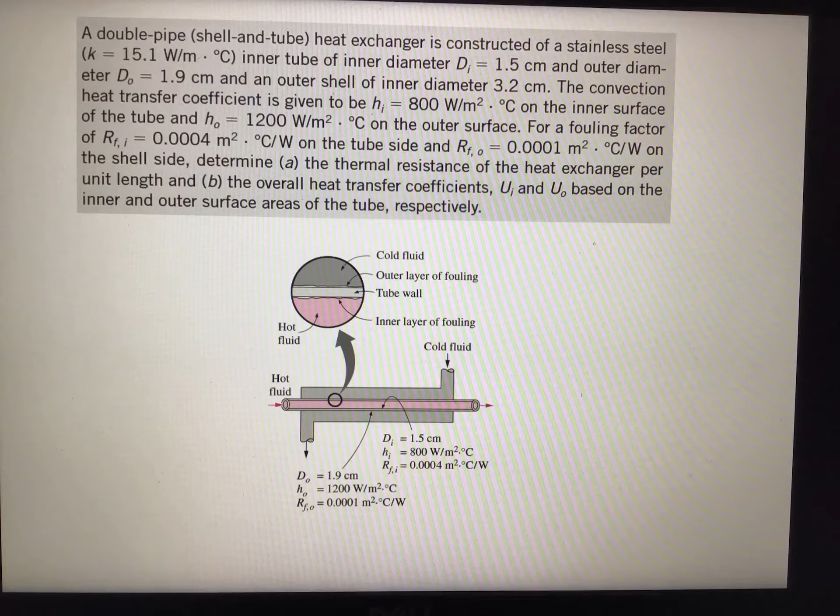We discussed during lecture that the overall heat transfer coefficient U, and we derived the equation for thermal resistance: R equals 1 over UAS. This is for the overall case. If you consider the inner surface, instead of U and A, you write Ui Ai; for the outer surface, U naught A naught. We all know this, so let's start with the solution.

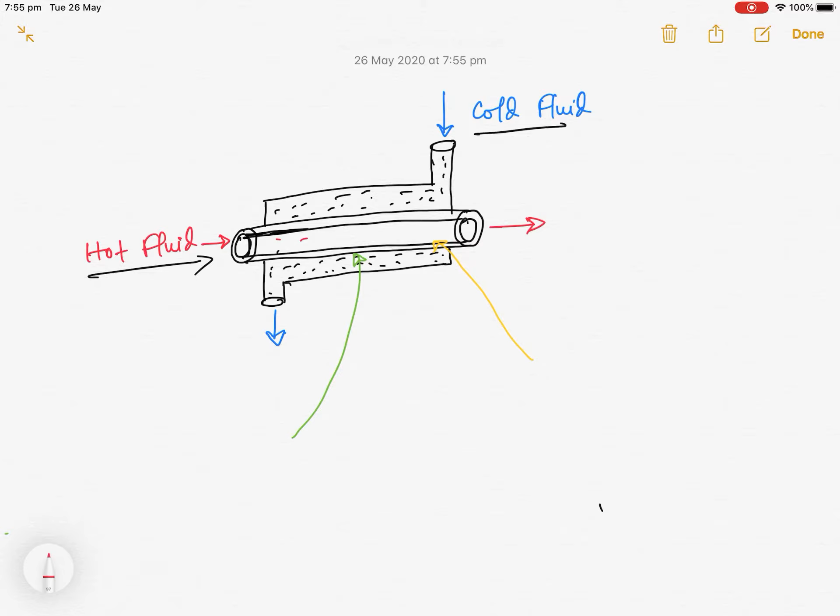Look, this is actually the drawing here. The hot fluid is going this way, and the cold fluid is coming from this way. So actually here, if we draw, this is the hot fluid.

It is going through this stainless steel, this metal tube, the inner tube. This is hot. This hot fluid is going through the inner tube, and the material is steel. This red color is the hot fluid, and you can see the color for the cold fluid.

Maybe I can use that color here instead of black. So this is actually the cold fluid. Now you see, this is actually the inner surface, inner tube, and this is the outer tube.

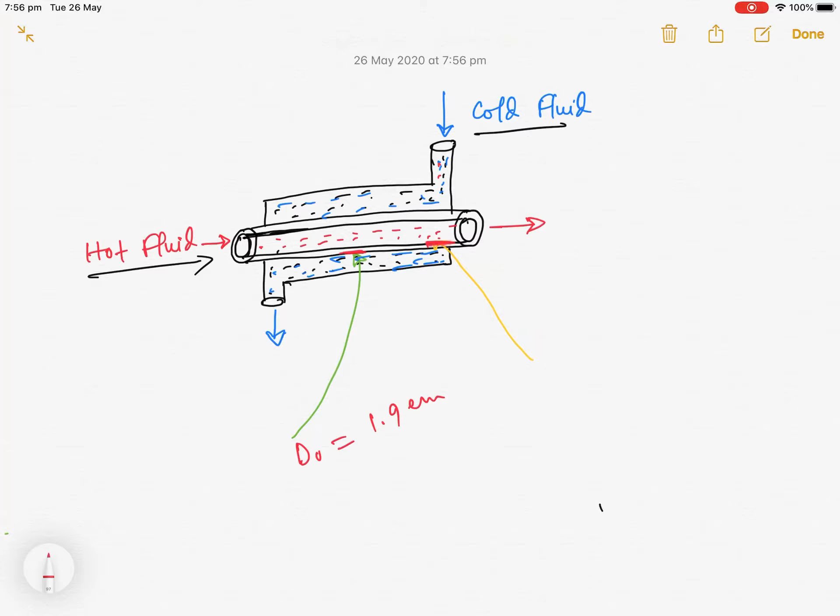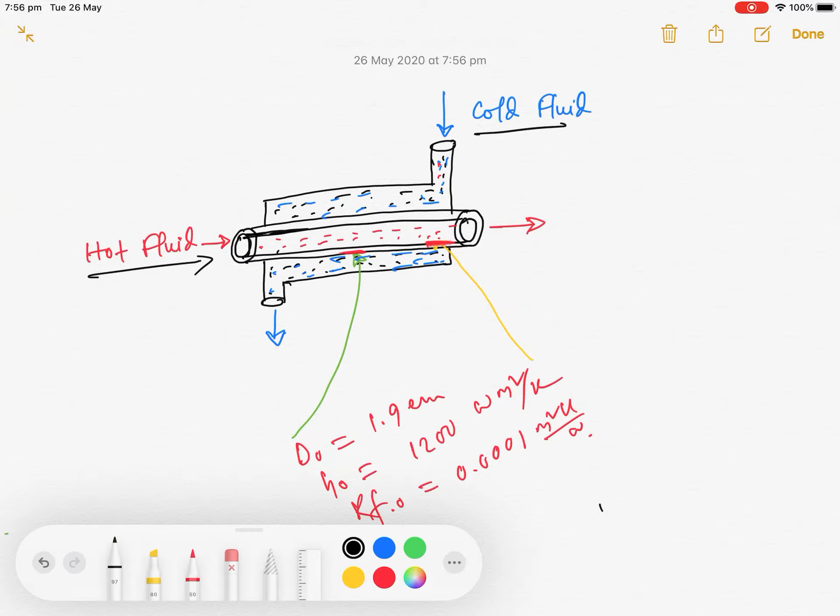For the outer tube, the diameter is given d naught equals 1.9 centimeter, the heat transfer coefficient is 1200 watt per meter square Kelvin, and the fouling factor is given as 0.0001 meter square Kelvin per watt. That's the values given.

Similarly, for the inner tube, inner surface, the inner diameter di is given in the question as 1.5 centimeter. H I is given as 800 watt per meter square Kelvin, and the fouling factor is 0.0004. This fouling factor is eventually the thermal resistance.

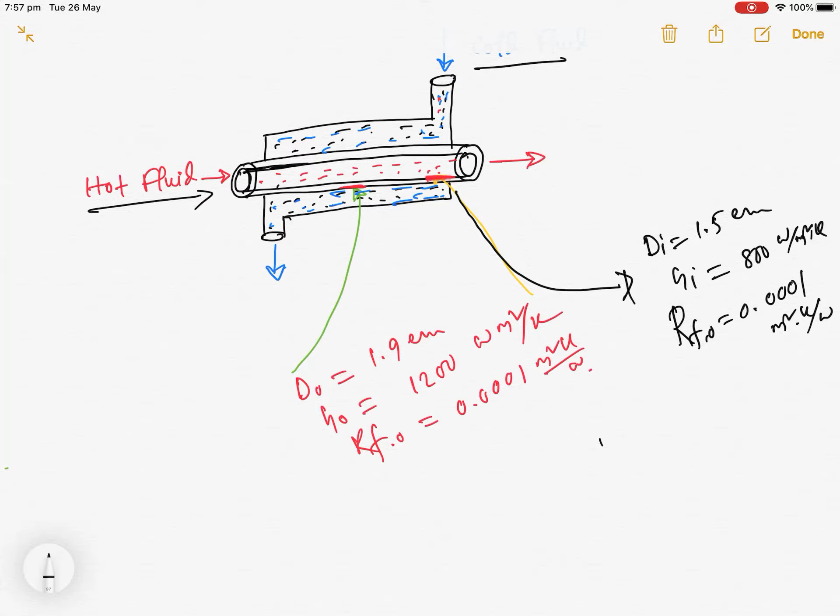We need to calculate this. To solve this problem, it first asks about the overall heat transfer coefficient for inner and outer surface and the resistance. If you know these relations, I believe you all know them from the formula.

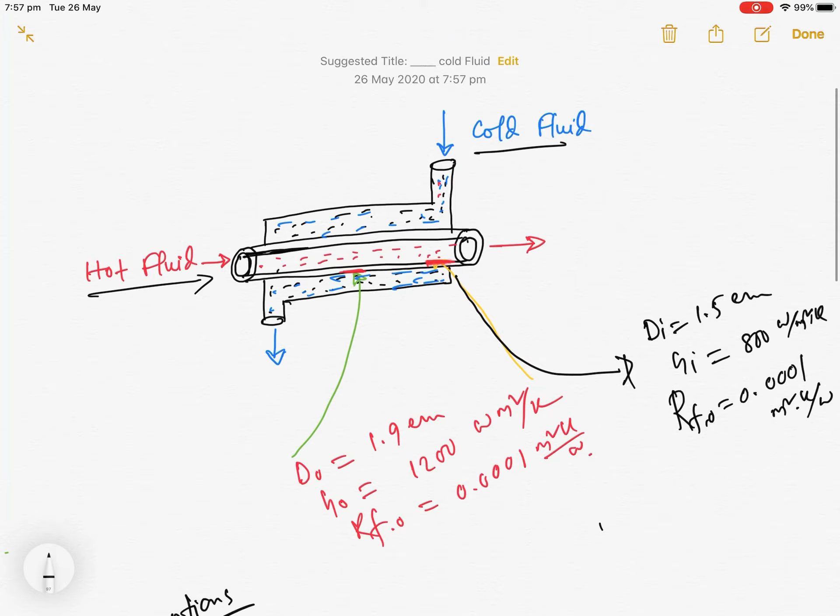Maybe what we can do, we'll not write down detailed assumptions here, but you all know that when we solve this sort of problem, we need to write some assumptions. What could happen is these fouling factors and heat transfer coefficients in real cases could change with the length of the domain.

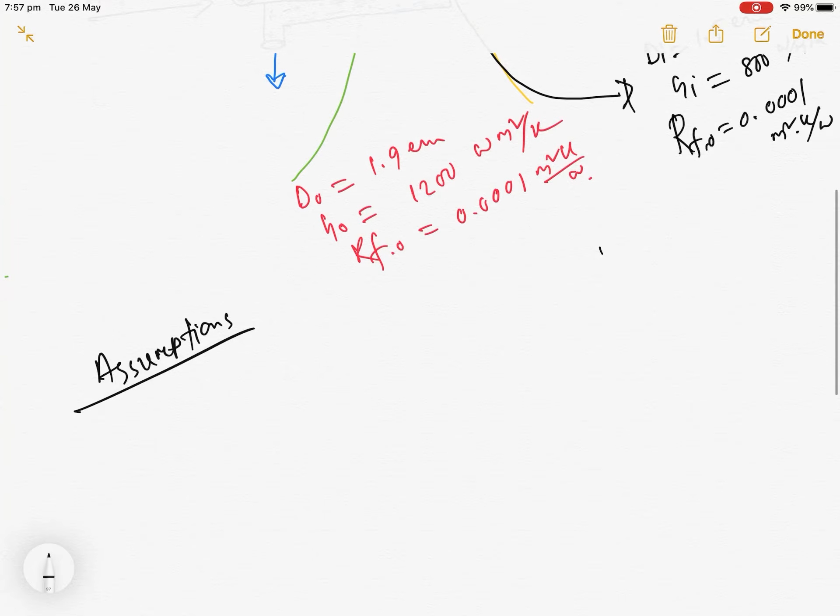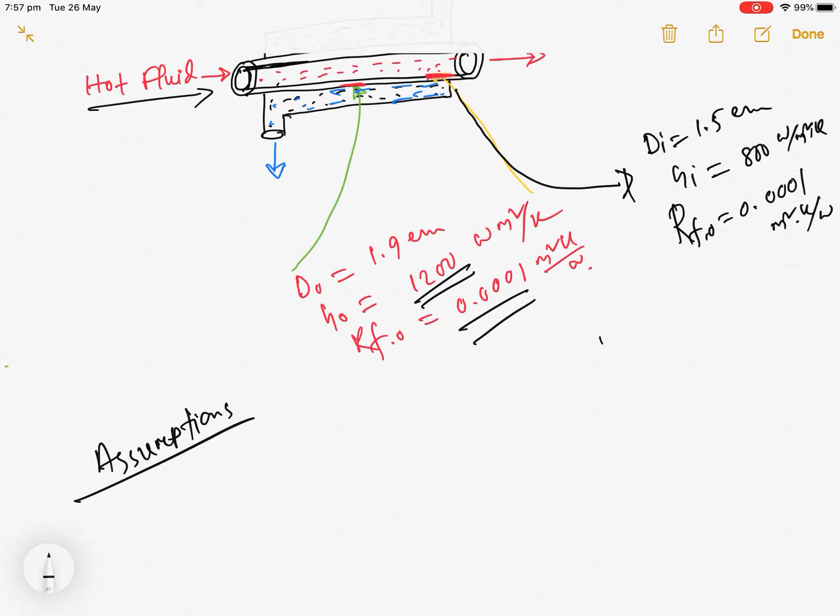In this case we consider that the fouling factor and the heat transfer coefficient are constant, and that's correct—it is given in this question that the fouling factor and the heat transfer coefficient are constant. So you can write that it is constant.

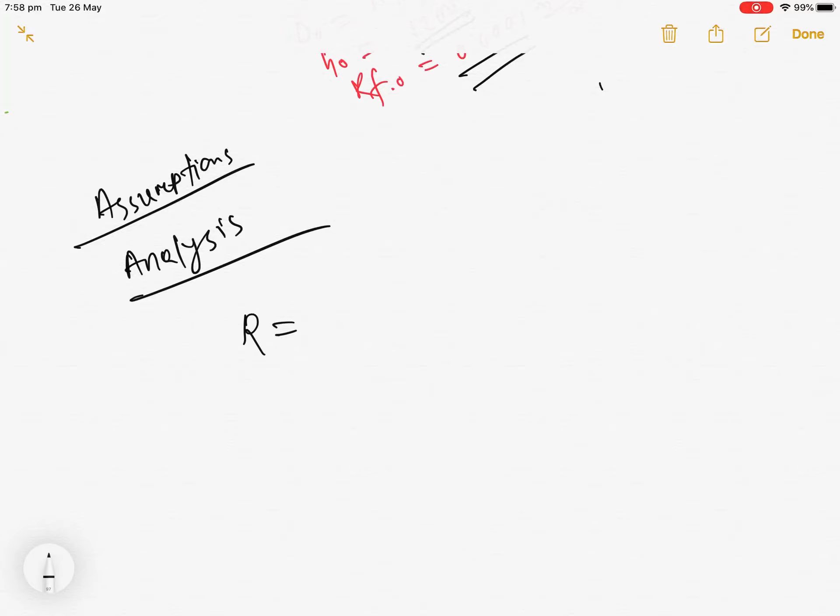So now when we start with the analysis, we actually need the thermal resistance R, and we know from the theory that R equals 1 over U A. This is from the literature, we already discussed it. It is the overall values.

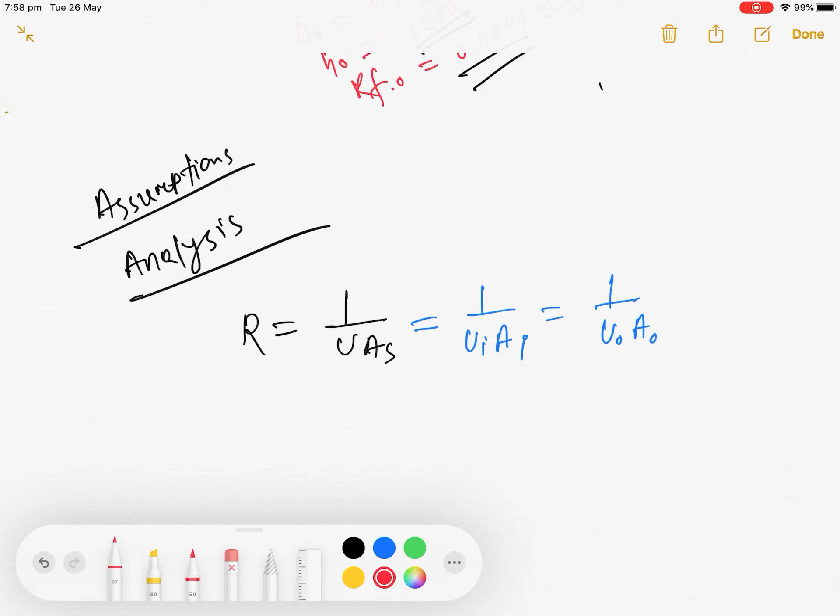If we think about the inner surface of the tube, we can say it is Ui and Ai. If it is for the outer surface, we can say U naught, A naught. So the first question is we need to calculate this R, and the second question is we need to calculate Ui and U naught. This is the second part of this problem, and this is the first part.

So that means you can see from here it is an expression with 3 unknowns, but we only know the area, and we can calculate the area easily. But then how will we calculate the resistance or the overall heat transfer coefficient if two values are unknown? So what do we know from previous weeks? Thermal resistance we can calculate in different ways.

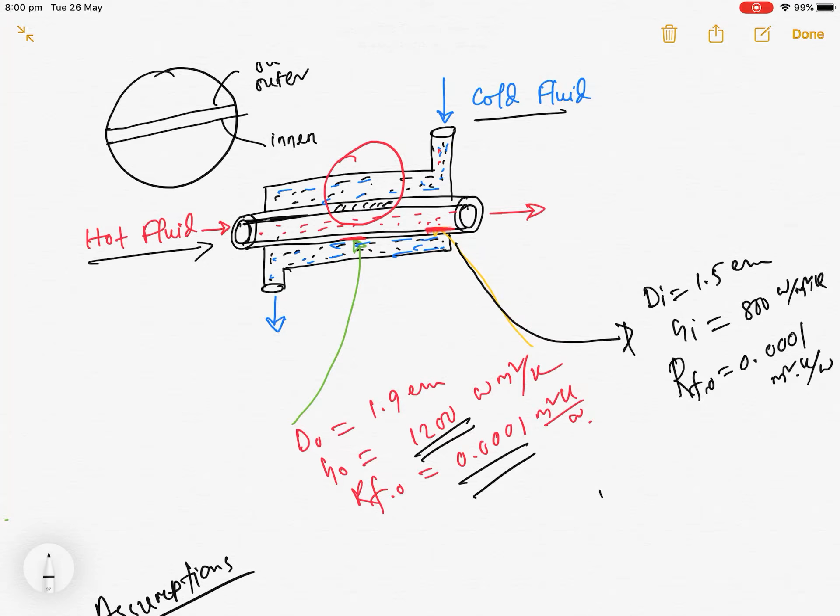So here, if you see, this is a double pipe, and you see the inner and outer tube from this drawing. If we enlarge this small section, it will be something like this - this is the circle, the red circle. Using the black one, this is the thickness. So this is the inner part, and this is the outer part, the outer section.

According to this question, it's given that we have the fouling factors here at the inner and the outer pipe. So we just enlarge this section, the red circle, we just enlarge that section.

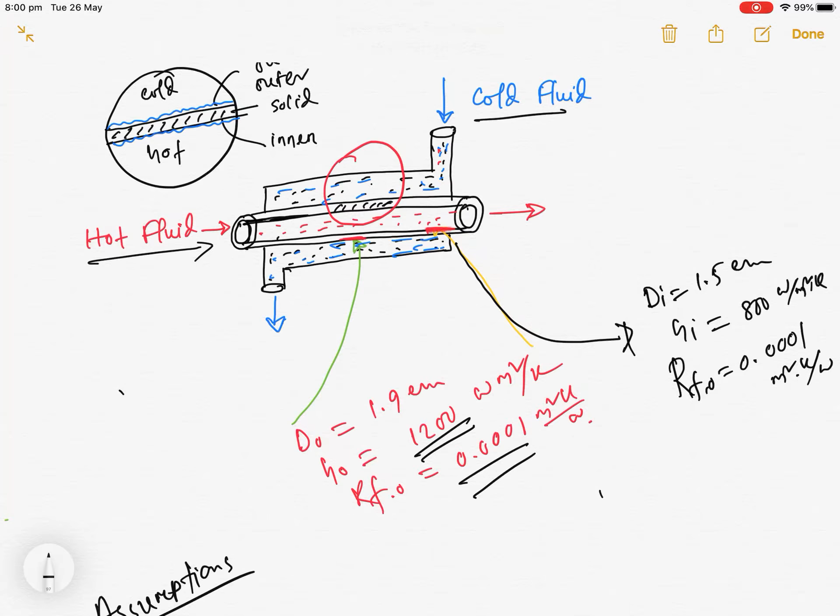So now if we draw the thermal resistance, look, this section is cold fluid, and this section is actually solid - this is the steel pipe, this is actually solid. Now it is fluid, so if I draw it like here, I think that will be much better. I can enlarge it like this.

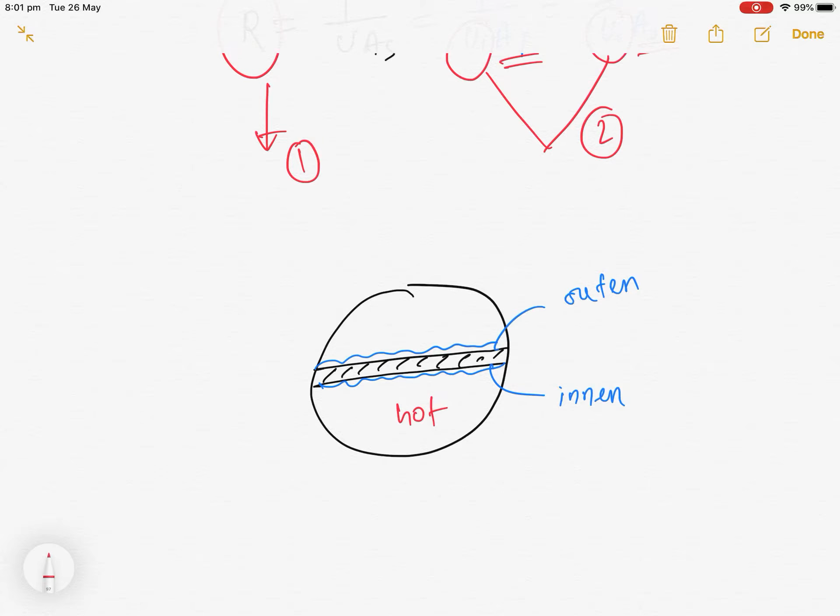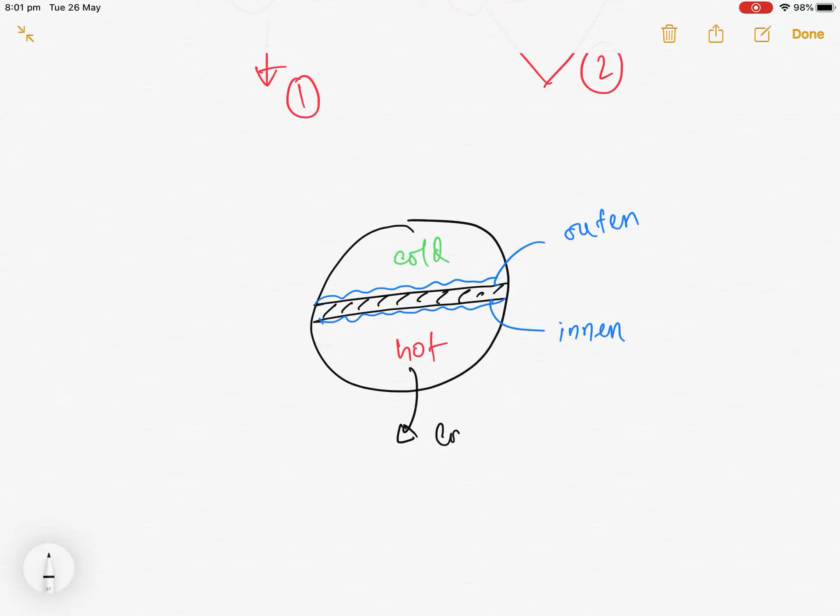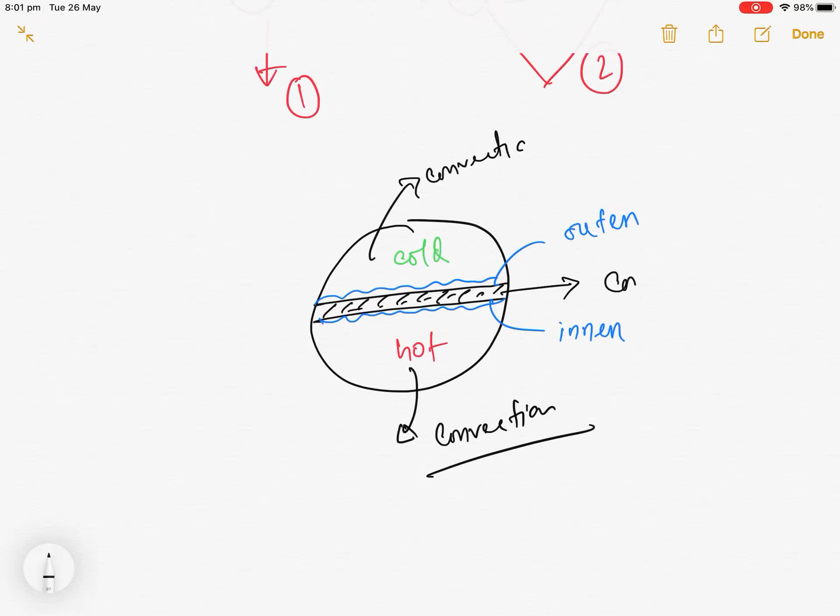So this is actually the solid, and we got the fouling factor here at the inner surface and the outer surface. This is inner, this is the outer surface, and it is hot fluid and cold fluid. So according to the heat transfer modes, this is fluid, so what will happen here in this section, it will be convection as well. This one is the solid, so in this case we can say this is the conduction process, and we have the foulings.

So if we draw the thermal resistance, the first one is for convection, the second one is for fouling, the third one is the conduction, the fourth one is again the fouling, and the last one is convection.

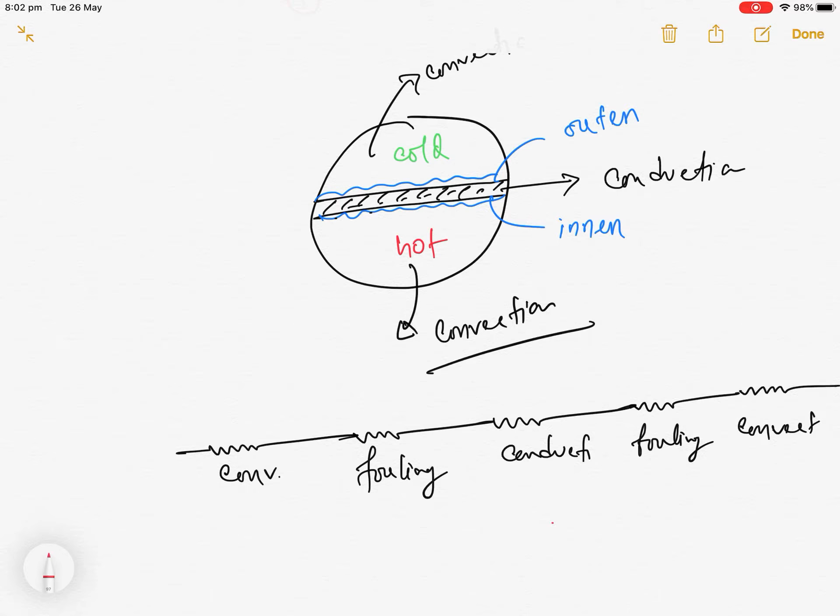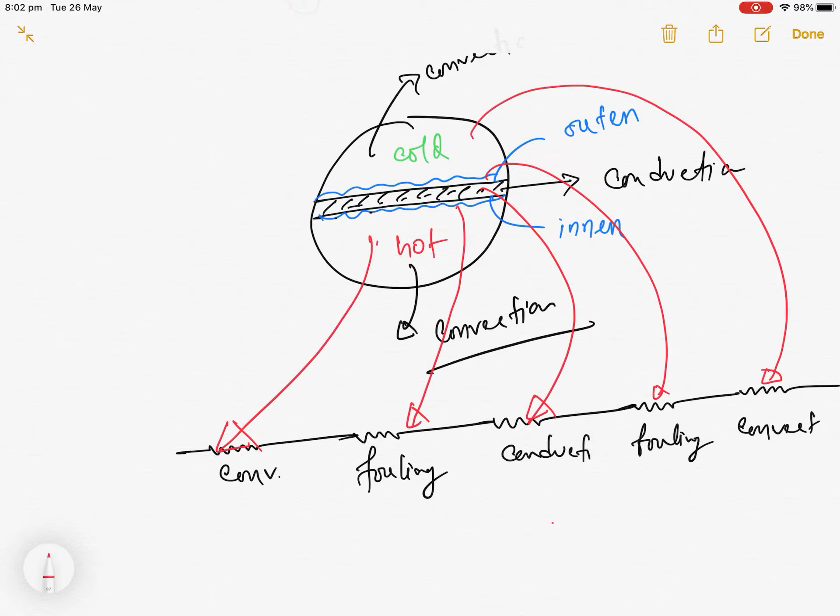Try to connect it. Here it will be the hot fluid, this will be convection. Now this fouling here, this is the solid, so it will be conduction here. This fouling is again fouling, and this cold fluid is the convection. So it will be the overall thermal circuit of this problem.

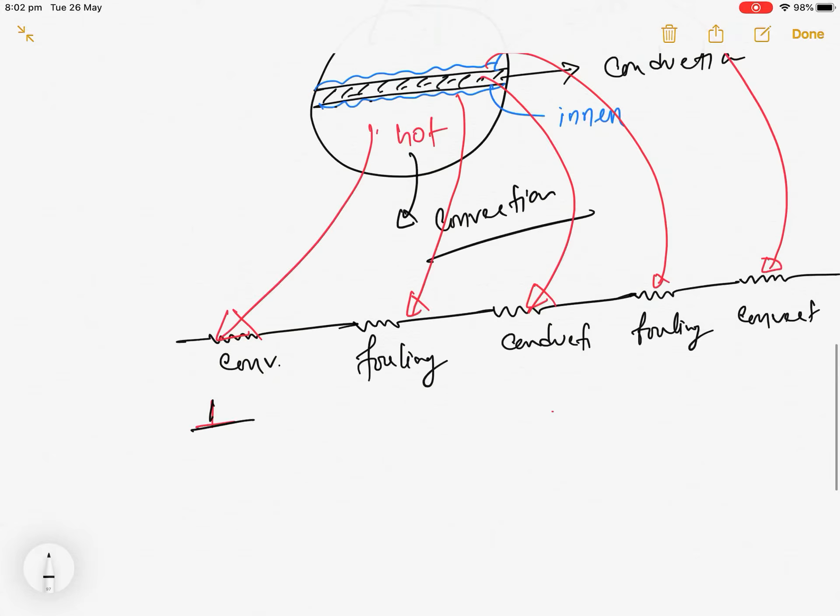So we know when it is convection, the thermal resistance we usually write as 1 over, what is it actually, the inner surface. So we can say it is h times A, so it will be hi Ai, because this is the inner surface. Now for the fouling, this is actually the fouling for the inner tube. So we know the fouling, we can calculate RFI over the area.

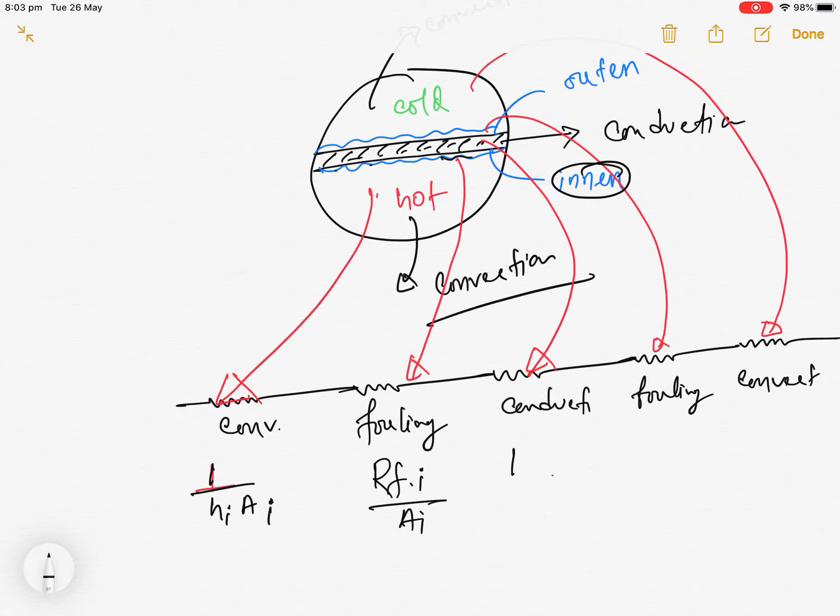When it is the conduction for an annular tube, we know that the thermal resistance is the logarithmic ratio of d naught and di, over 2 pi k L. Here this k is actually the thermal conductivity, so that's the conduction. This fouling is for the outer surface, so we can say RFO over A naught. And for the last one, the convection, this is for the outer surface, so it is h naught A naught. I believe you understand what I did here.

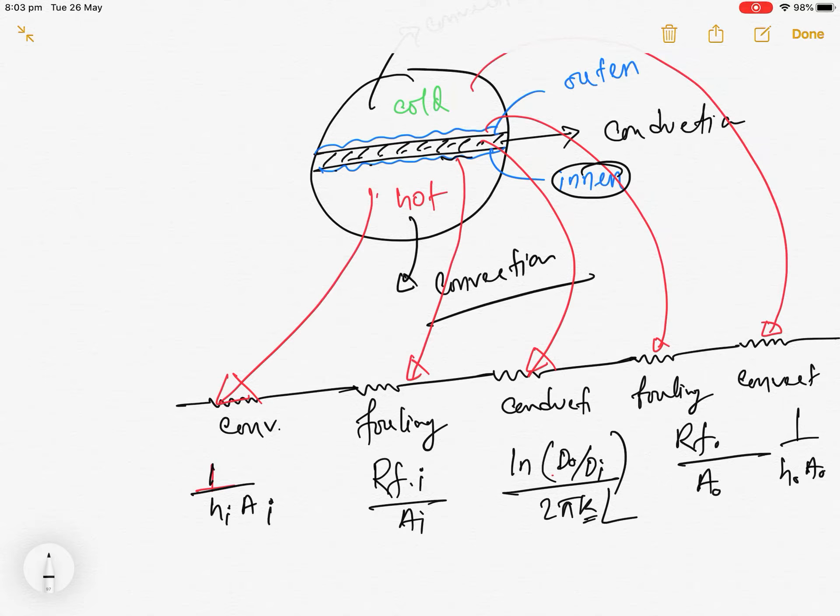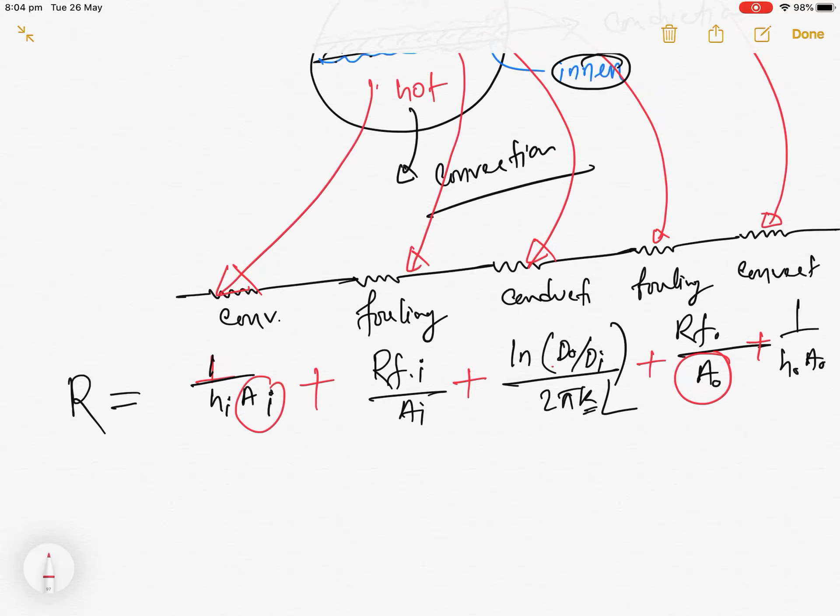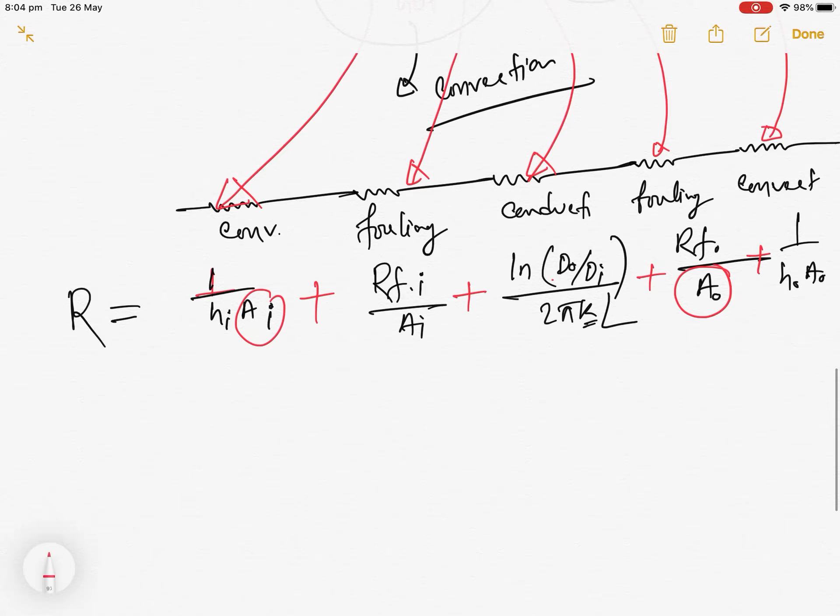So here, the total thermal resistance R will be equal to this plus this plus this plus this. That's the overall thermal resistance. Now what we don't know, guys, is the area AI and the area A naught. Those are the two values we don't know. And hi, h naught, those are given. The h naught, RF naught, all these values are given except the area.

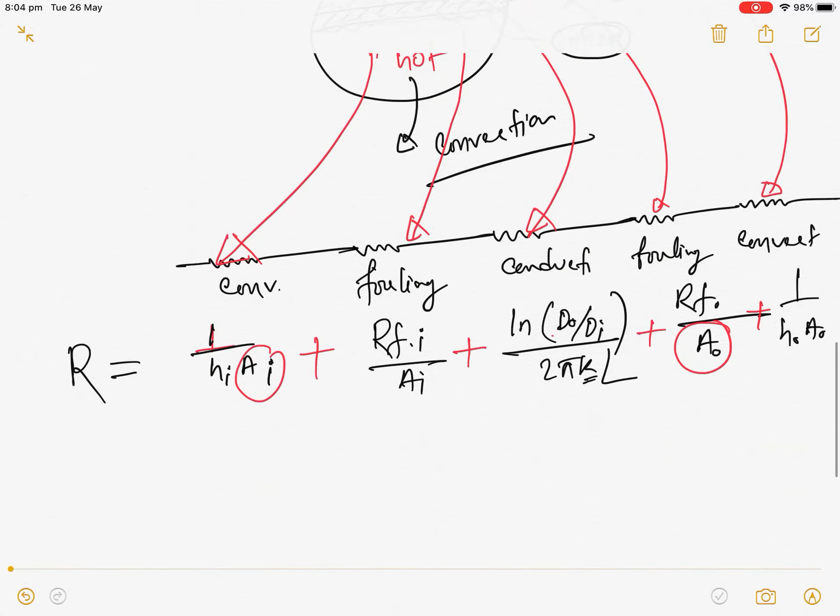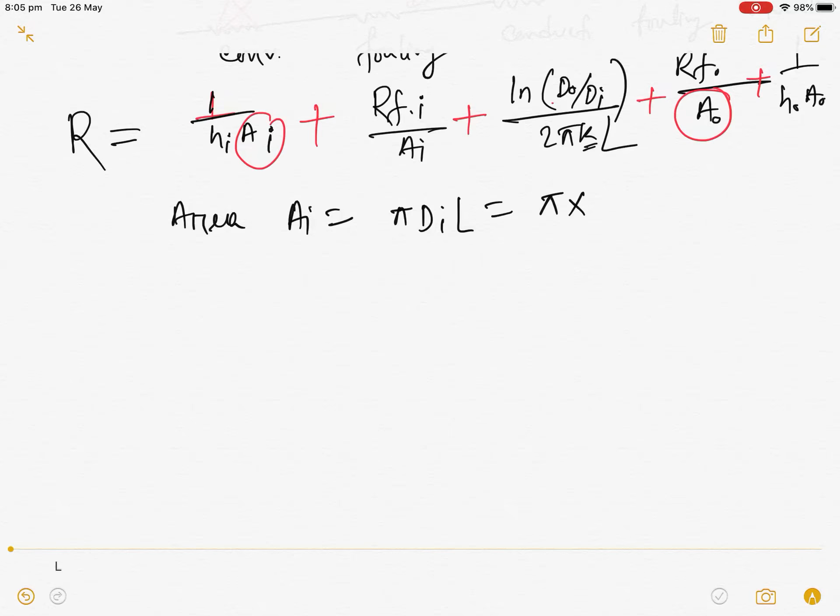Now if we calculate the area Ai, it is circular, so pi Di L. Pi is constant, Di is 0.015, and L, the length, is for unit length 1 meter, so it should be 0.0471 meter square. The area A naught for the outer domain is pi D naught L, so the outer diameter is 0.019 and length equal 1, so it is 0.0597 meter square. We got the area.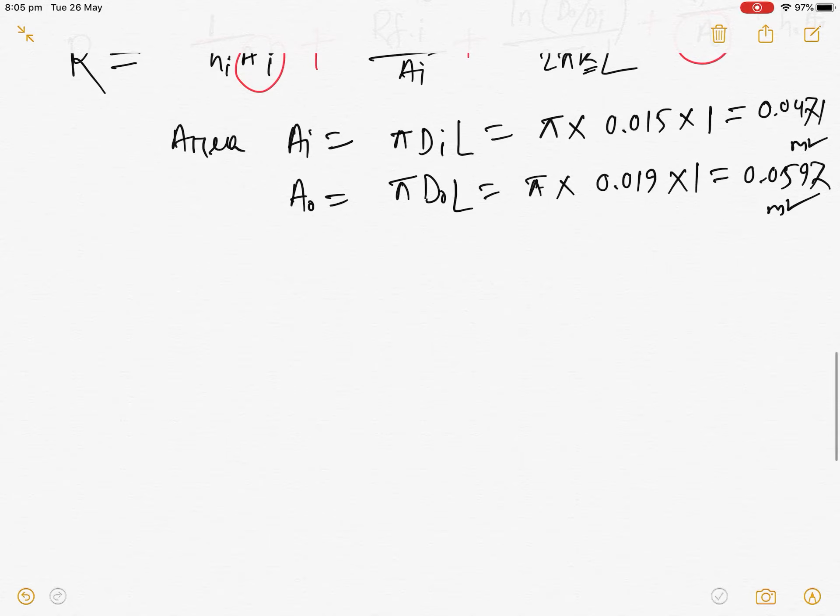So once we got this area, then what we can do is calculate the resistance. We will substitute all of these values into the above relation.

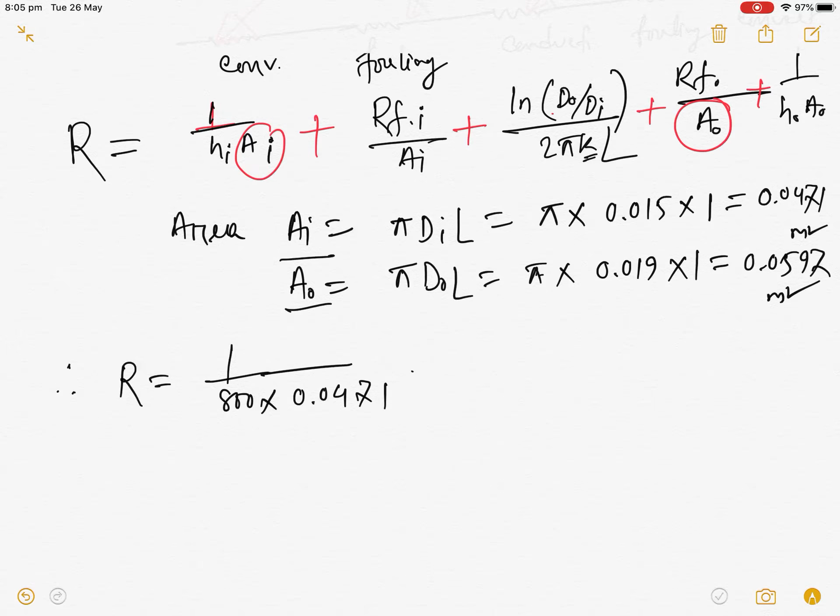So h i is 800, and the area is 0.0471. The fouling for the inner tube is given as 0.0004, and the area is 0.0471. Now the logarithmic ratio of the inner and the outer diameter: the outer diameter is 0.019 over the inner diameter 0.015, over 2 pi. Thermal conductivity is 15.1, and length L equal 1.

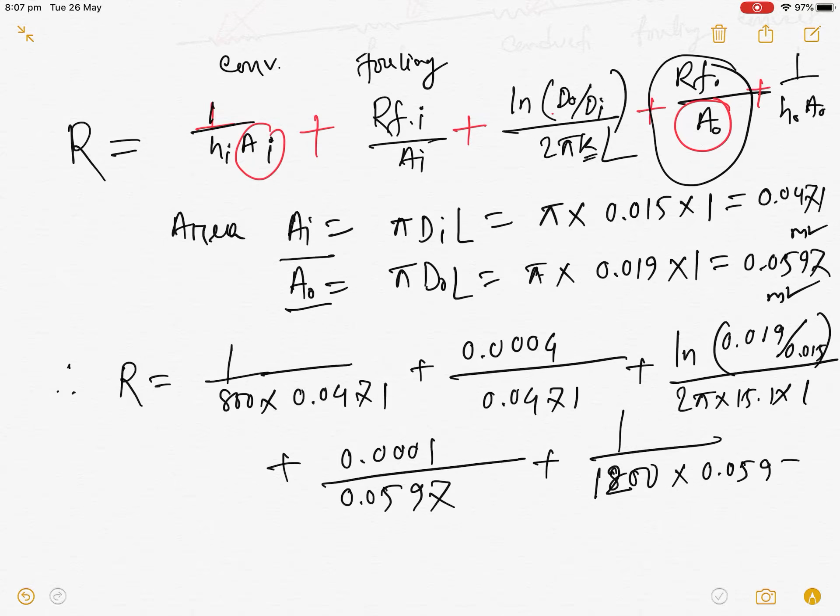Plus now this one, the RFO, the fouling, 0.0001, and area for the outer domain is 0.0597, and finally the h naught is 1200, the outer heat transfer coefficient, and it is 0.0597.

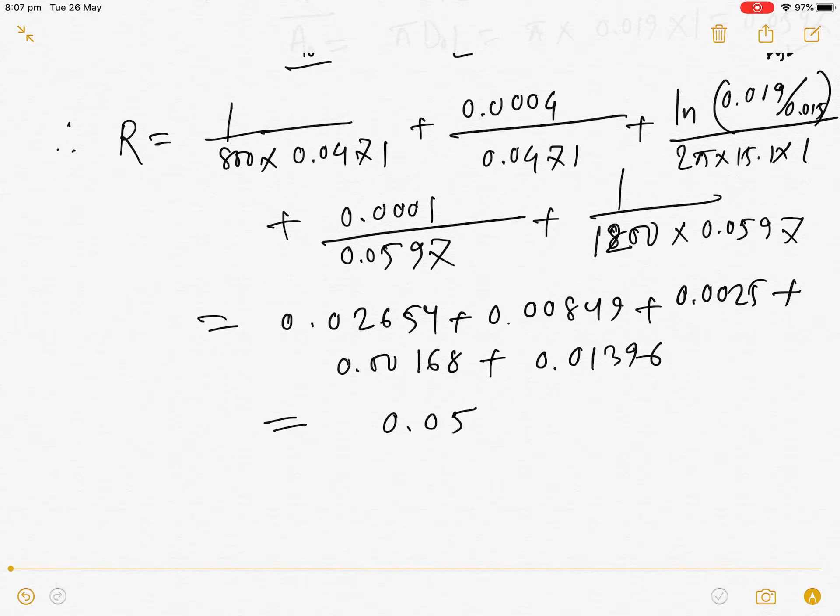So it will be something like 0.02654 plus 0.00849, it will be 0.0025 plus 0.00168 plus 0.01396. So the total value will be 0.0532. This is actually, sorry, the resistance, the total thermal resistance.

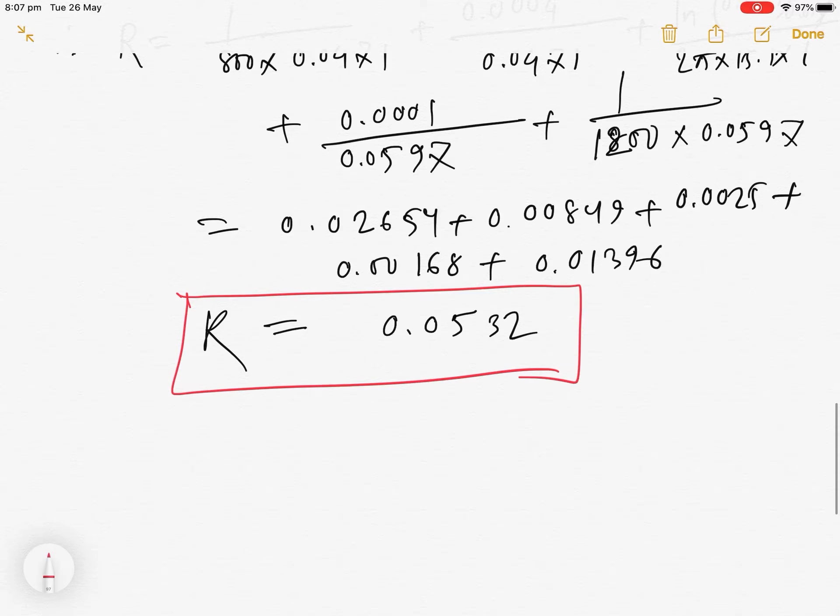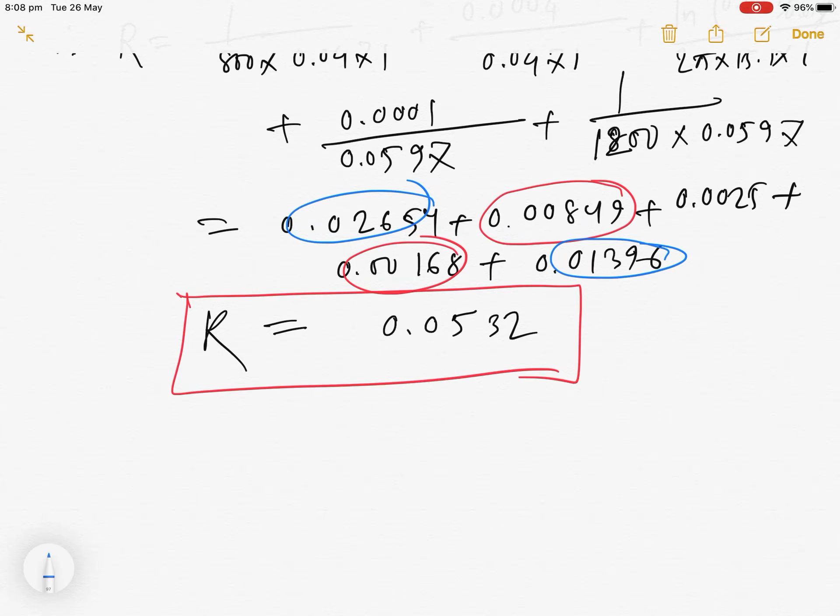What I got from here: these two values, this one and this one, are for fouling. Those two values are for fouling, and these two values, this resistance, is for convection. This is the convection resistance. So what we got from here, maybe it is not important, but if you want to write down some discussion, you can see this is the total value.

So if we calculate the percentage, we found 19% of the resistance is actually due to the fouling. Only 5% of the resistance is due to the conduction, the solid steel. And the rest, like this is 24, that means another 76% resistance is due to the convection. This is just for the discussion.

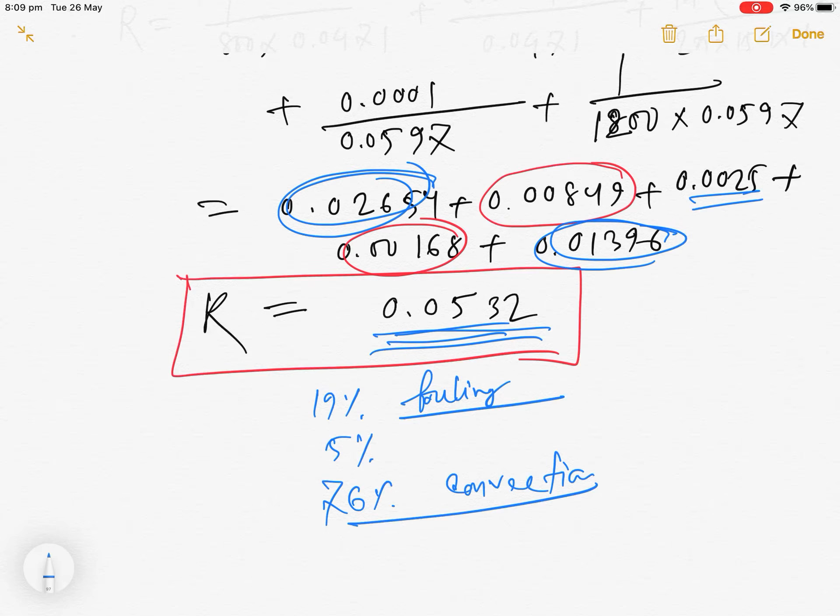If you calculate the percentage for this, the total one, and then this, you see the red two, it is for fouling. So calculate the total of these two values and then calculate the percentage. Maybe it is not important for you anyway.

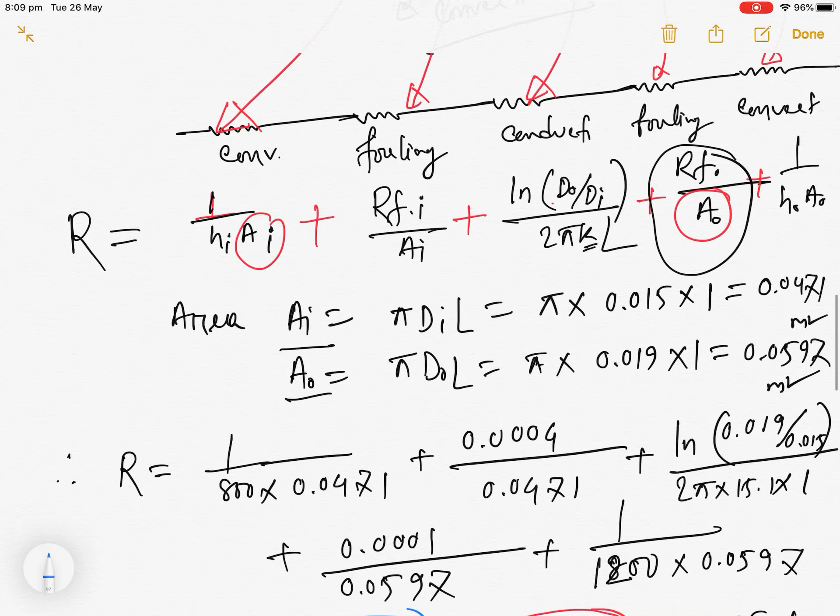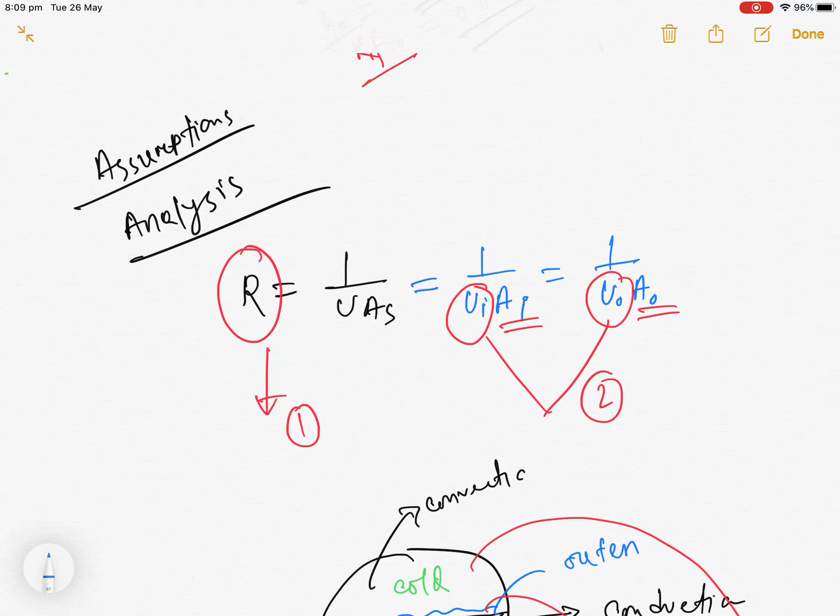So now we did the first one, the resistance. Now actually we need to calculate the local values like Ui and U naught, that means the overall heat transfer coefficient. So if we use this formula, R equal 1 over UiAi, then Ui will be 1 over RAi.

So the resistance R is 1 over 0.0532, and the area is 0.0471. So it will be 399 watt per meter square Kelvin.

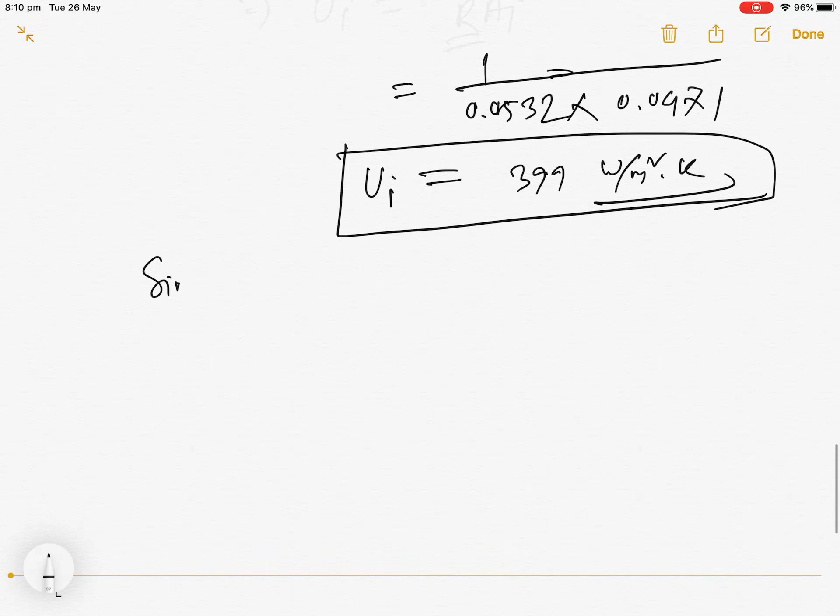You need to do similar calculations for your heat exchanger report. So when we have done with this, we need to calculate the value U naught. Similarly, U naught will be 1 over RAo. R is the same, 0.0532, into the area A naught which is 0.0597. So we'll get 315 watt per meter square Kelvin.

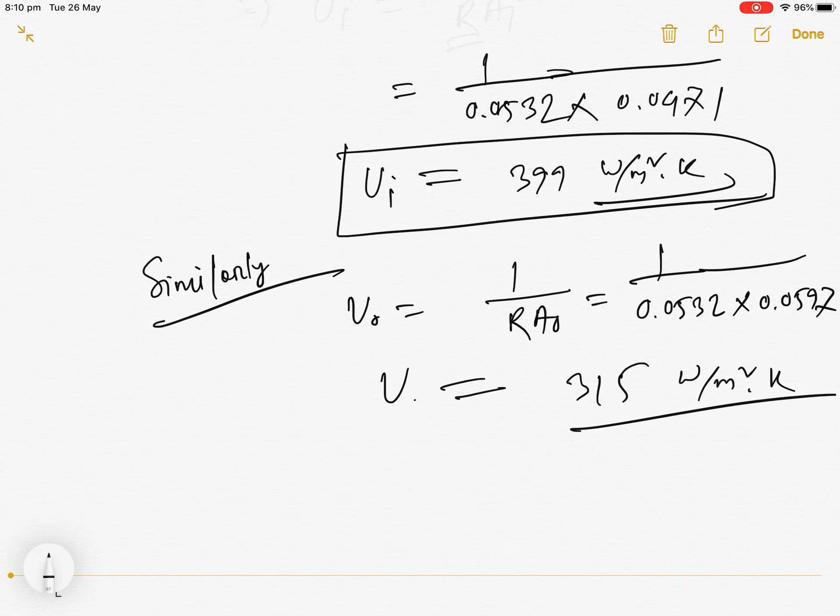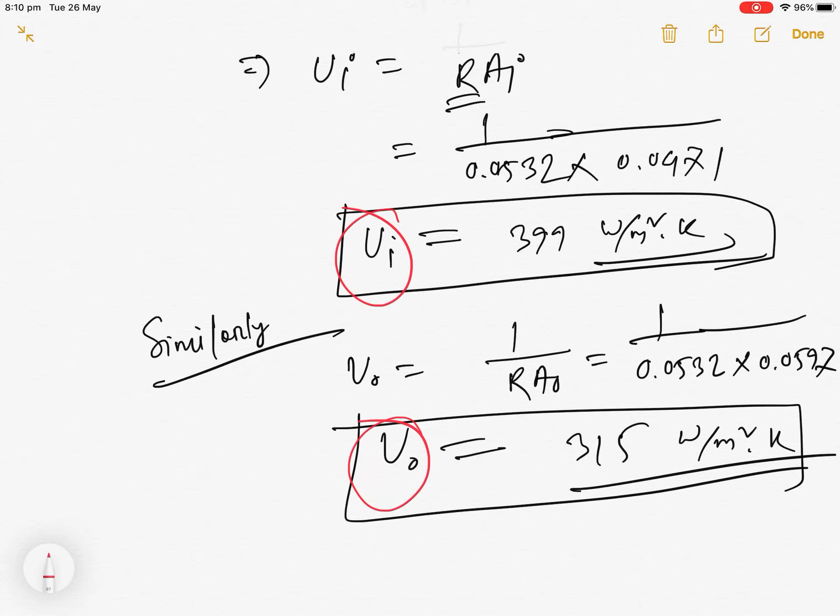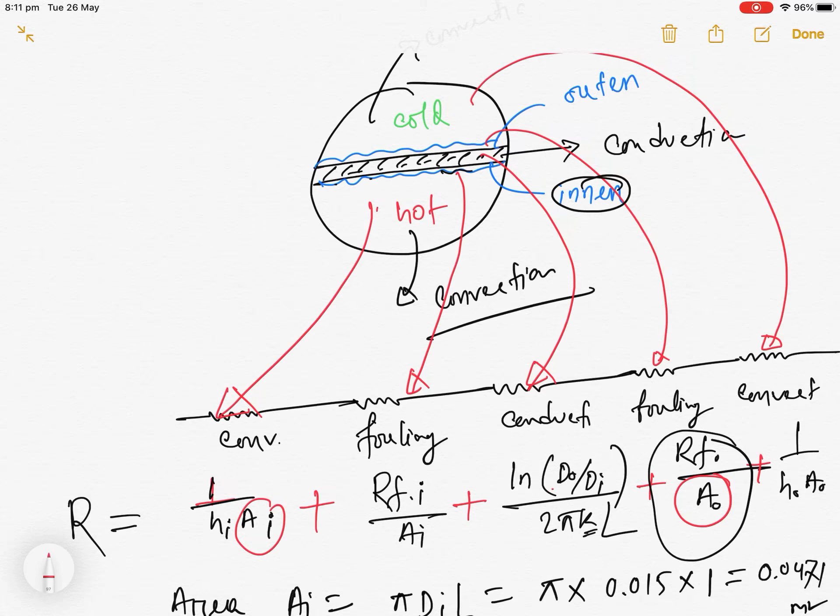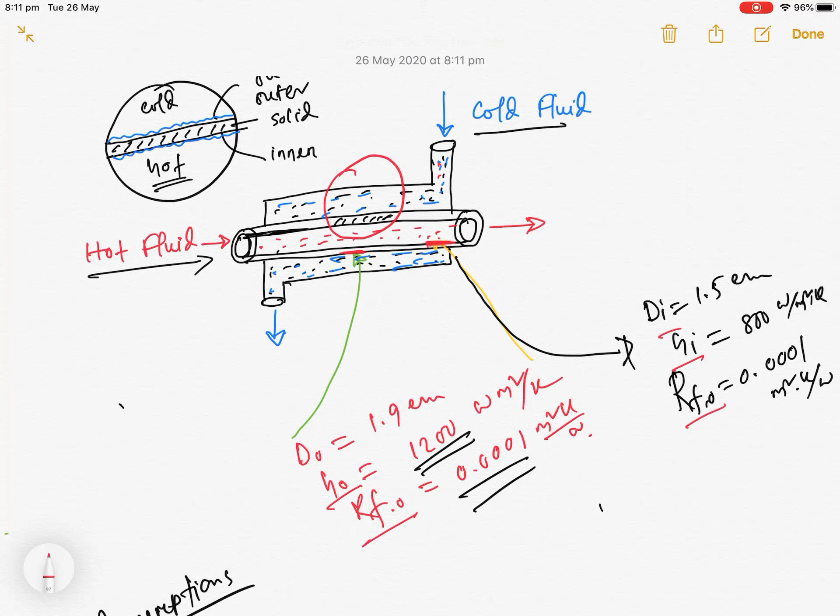The important part was whether you did the correct drawings for your thermal circuit or not. So you see here, I explained already. That's actually the problem. I believe you understand clearly, and if you have any confusion, maybe we can discuss during the lecture again. So try to find out some similar problems.